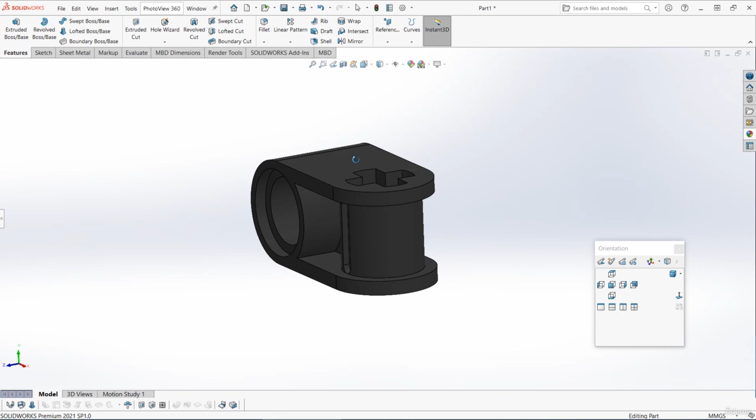The next part that we're going to make is called a cross block, and it basically allows you to join a pin and an axle at 90 degrees. Now, I feel like I say this quite often, but this part really could be made in quite a few different ways. So just for now, I've hidden the design tree. Have a look at this part in 3D and maybe pause the video and have a little think about how you would make this, what steps you would take.

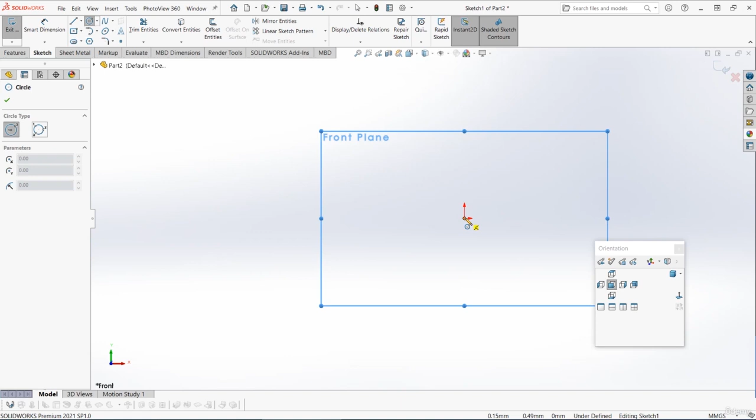Let's actually start modeling and see if we had the same ideas. I'm going to start a new part and start a sketch on the front plane, and I'm going to start with the part where the pin goes through. So I'm going to get the circle tool, I'm going to draw two concentric circles at the origin. These are for the outer size, which is 7.4 millimeters, and then the inner bore, which is that usual 4.8 that we've used in quite a few parts so far.

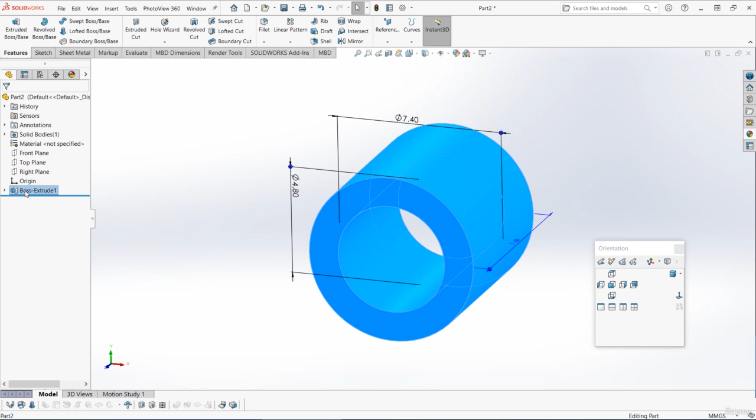And then I'm going to do a mid-plane extrude, and this part is actually the same width and height. So the extrude is 7.4 as well. This is the area where the pin will fit in, so I'm going to rename this as pin side. Next up, looking at the part, I'm actually going to make those little sort of ears that come off the top. To do this, I'm going to start a sketch on the plane that goes through the middle. So for me, it's the top plane. Start a sketch on there, and I'm going to go normal to.

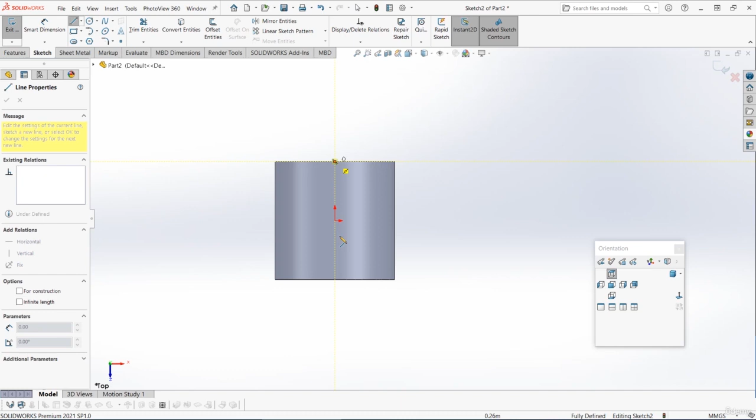Then I'm going to get the line tool, and I'm going to draw something like this. I'm going to start at the midpoint here and go down to the other midpoint, and then go out to the right-hand side. And then I'm going to start a new line across the top that's the same as the bottom one. Now we're going to join this open end using an arc. So you can go to the arc tool, and we're going to choose a tangent arc. Start from one of the open ends of the line and go round and finish at the other line. So it's tangent here at the top and also at the bottom.

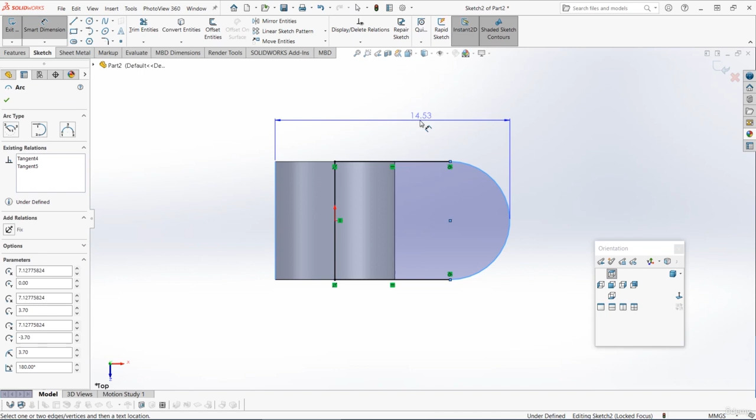We can then use Smart Dimension to set the size. So let's start here on the very left and go out to the outside of the arc. So again, you'll need to hold down Shift to dimension to the outside of the arc. And let's set that length as 15.4 millimeters. This profile is going to make up that little ear on the top of the part. So we want to extrude this area upwards. But we don't want to extrude in the middle of the part. We want to extrude on the very edge of that circular section we've already made.

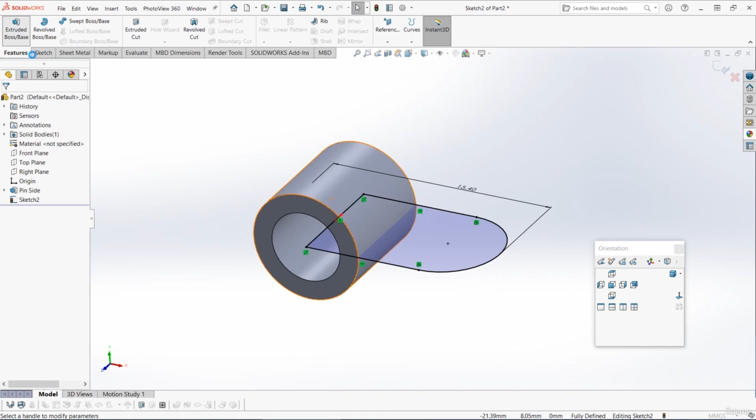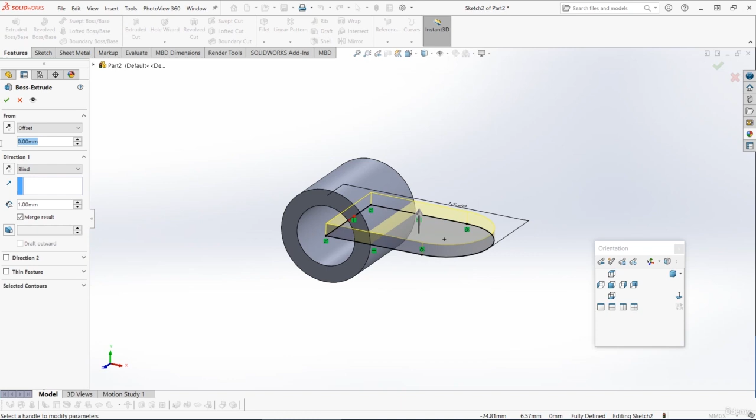So when we make the extrude feature, we can actually offset where it starts from. To do this, go to Features and just choose the standard extruded boss base. Firstly, we want to extrude in a blind direction 1 millimeter, but before you press OK, let's offset the start point. You can do this by clicking on this From drop down here, and let's change it to Offset. We can then set the offset amount. So we know that the total diameter of that circular section is 7.4, so we want to offset half of that, which is 3.7. So let's write in 3.7.

Just before we press OK, we can see we're extruding in the wrong direction. We're extruding upwards when we should be extruding downwards. We can correct this just by flipping the direction by pressing the reverse direction box here on the left. And when your preview looks good, press OK to make that first ear. And I'm going to call that feature something like side ear.

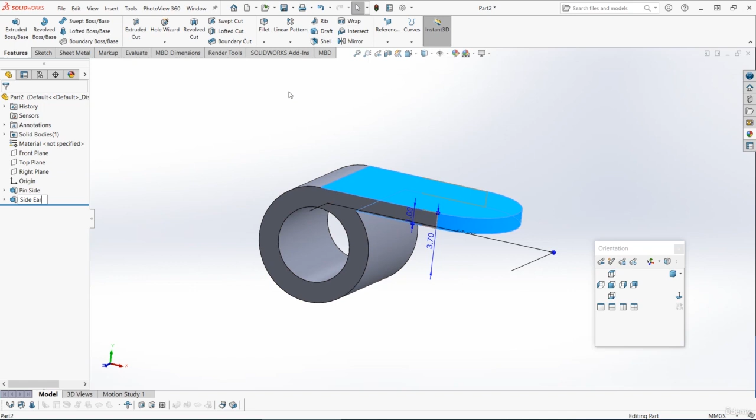We can then mirror this over to the other side. So select that side ear feature, then also select the appropriate plane. For me, it was the top plane, and then press mirror. And the preview looks good, so let's press OK to mirror that ear down onto the bottom. Next up, I'm going to draw that rib in the middle that joins the two ears together. So I'm going to start a sketch on the appropriate plane.

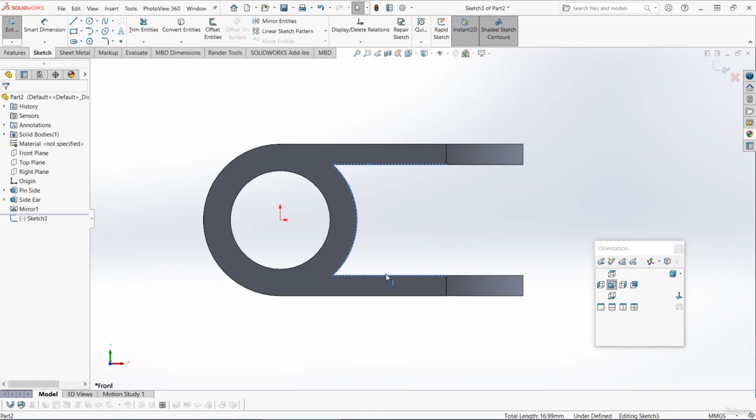That's the one down the middle, the front plane here. And then I'm going to go to a normal to view. I'm going to select these 3 edges and convert them all. And then I'm just going to draw a line across the middle there to close the profile. We can then extrude that and do a mid-plane extrude. This is 1.4 millimeters wide.

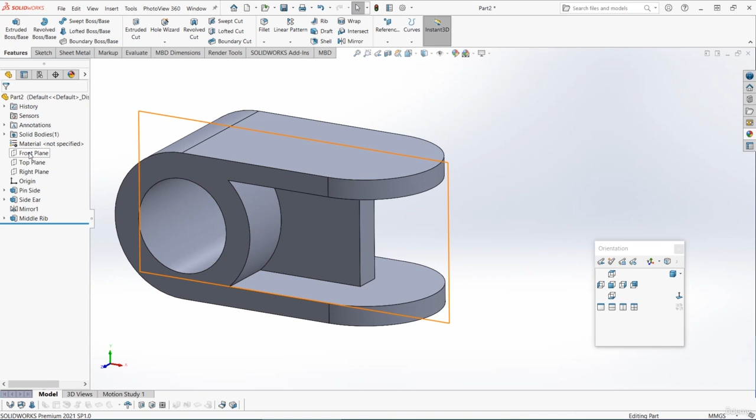So hopefully you can see we're starting to build up the shape now, and I'm going to rename that feature as middle rib. Next up, I'm going to add that circular part where the axle goes through. So I'm going to start a sketch on the top plane. I'm going to get the circle tool and go normal to, and I'm going to draw a circle that's concentric with that circular edge on the end. So I'm going to start at the midpoint of that circular edge. I'm going to go out and set the size as 5.7.

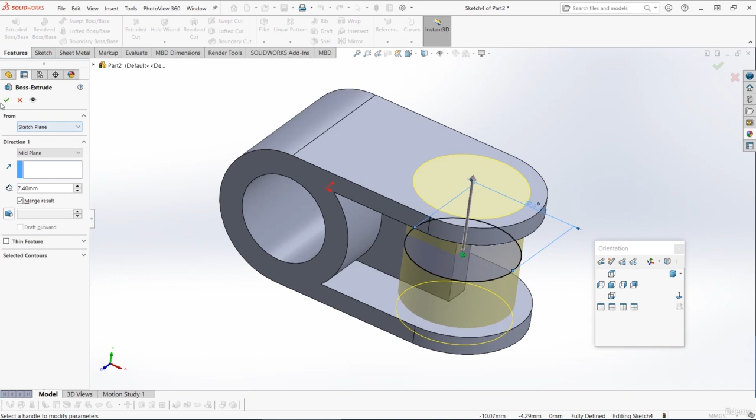I can then do a mid-plane extrude, and I'm going to set that as 7.4, so it goes exactly up to the edges that we've already made. And I'm going to call that feature something like axle body. So we're almost there now. The next thing we're going to do is cut out the cross shape for the axle. Start a sketch on the top plane, and we're going to draw and cut out that usual shape that we've done quite a few times now.

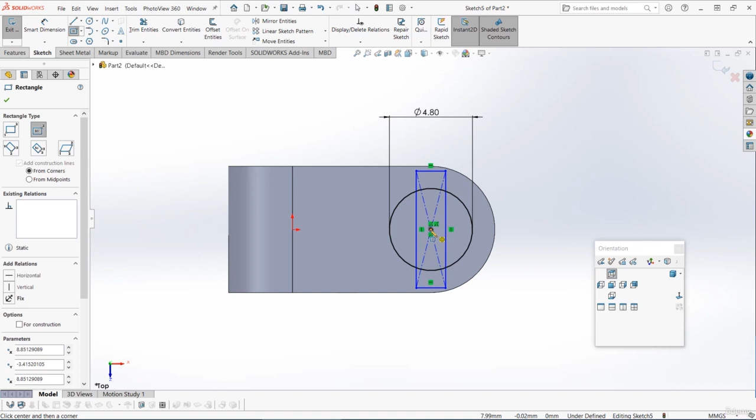So get the circle tool. Let's draw a circle that's 4.8 millimeters diameter. Then get the center rectangle. We'll draw our 2 center rectangles. We'll make the rectangles the same width, which is 1.8. And then we'll add those tangent relations to join the rectangles with the circle. When you've done both of those, we can do an extruded cut. We can go through all both, and we can choose those usual 5 sections to cut out that cross-shaped axle area. Then I'm going to rename that feature as axle cut.

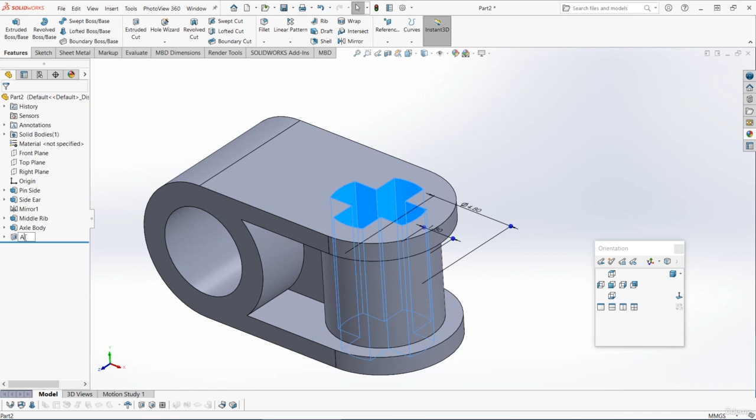The next thing we need to do is cut a slot through the middle of that axle section. So start a sketch on the front plane, get the slot tool. I'm going to get a center point slot, and I'm going to draw a slot somewhere in roughly this position. We can set the position mostly using relations. So firstly, let's select the origin. Let's also select the center point of the slot, and let's make those horizontal.

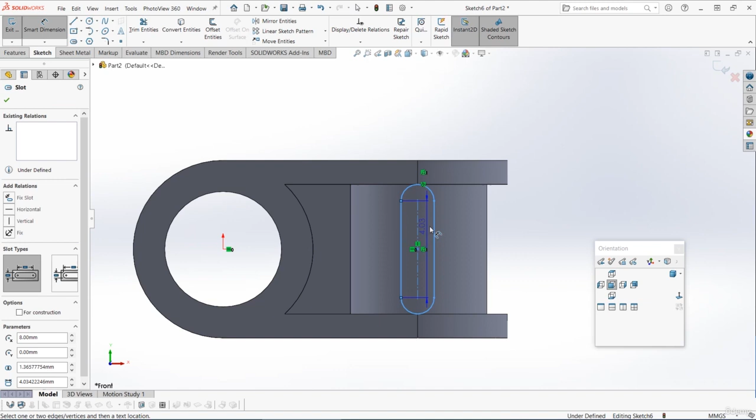Then let's get the center point of the slot again, and we'll line that up with this edge above here. So you might need to add a coincident there. You might be able to use a vertical, depending exactly what you select. Then let's select the outer arc of the slot, and let's make that tangent with this lower edge here. And then finally, let's set the width of the slot as 1 millimeter, and that should fully define your sketch. If it doesn't, you might just need to add in a few more relations or dimensions to do that.

We can then use this slot shape to do an extruded cut through all both, and we can call that feature axle slot. Then we've just got one final set of features to add, that rim cut around where the pin goes in. So let's start a sketch on this face, get the circle tool, and draw a circle at the center point of that hole. Let's set the size of that as 6.2 millimeters, and then just do an extruded cut blind 0.8 to cut that little rim section. I'm going to call that one pin rim, and then we can just mirror that over to the other side to finish the modeling.

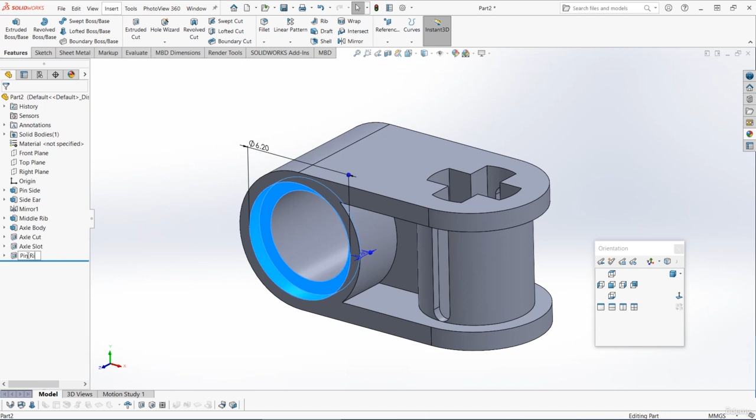So select the pin rim, also select the appropriate plane. For me, this was the front plane. And then if the preview looks good, let's press OK to create that mirror. And we've now finished modeling. So actually in the end, the part wasn't too bad. We just went through it logically and built it up out of simpler features.

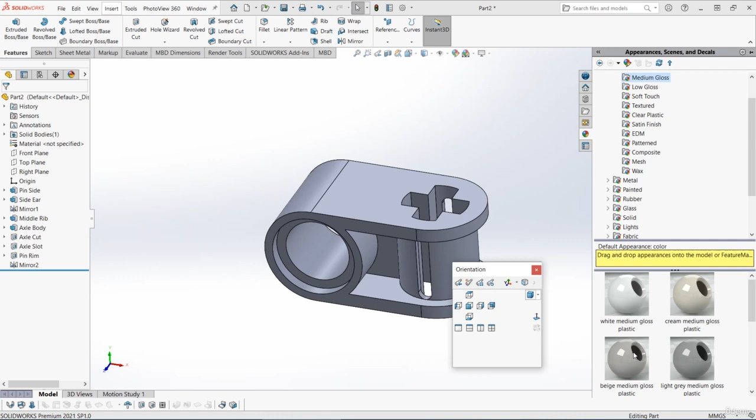We can now open the appearances, scenes and decals tab, and we can add the appropriate color, which is a dark gray or black. We're now totally finished, so we can save this part. Let's call it crossblock 30465. In the next video, we'll take these two new parts and we'll use them to complete stage 3.